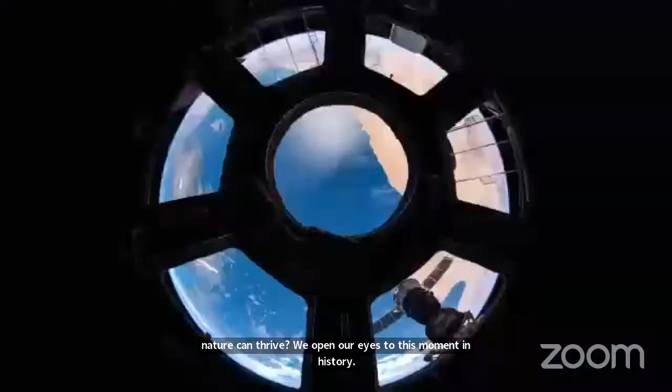How do we create a future in which both people and nature can thrive? We open our eyes to this moment in history. Think on a planetary scale. Embrace the challenge we face. And do something we humans are very good at. Change the world.

This biodiversity loss is not just a tragedy. It's the single biggest problem we face. Without biodiversity, the world as we know it doesn't work. Our planet needs its wild spaces. Every one is a component in the global machine. Only if they are all healthy can the planet run smoothly. A less wild world is less able to provide for our needs, less able to maintain dependable weather and seasons, less able to absorb our impact.

Can we turn this situation around? Can we rewild the world? Well, maybe, due to one key change.

As societies develop, something is happening that has never happened before. People are having fewer children. Globally, since the year 2000, the number of people under 16 years old has hardly changed. The main reason our population is still rising is because people are living longer. If this continues, our population may finally stop growing by the turn of the century. By investing in education and women's rights and raising people out of poverty, we could bring about peak human even sooner. This changes everything. It gives us the opportunity we need to regain our balance.

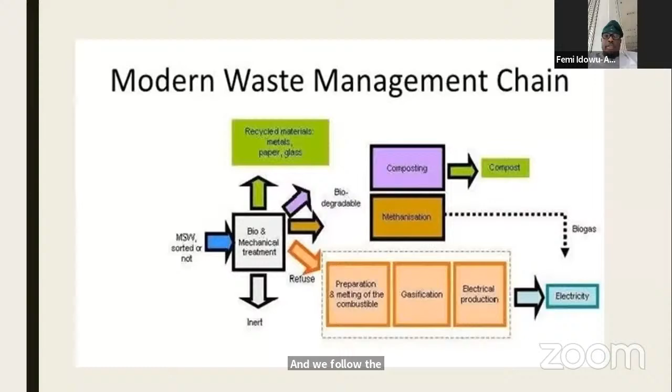Next slide, please. The next slide talks about different technologies. I've decided not to just jump into the technologies, but to tell us as individuals what we can begin to do to aid the treatment process. There are different options, which include segregation. If you generate waste, can you segregate it from your point of generation? Source segregation, source separation.

Then we look at reduction, which I call the optimum R. There's a general 3 R's, but we can break that down into several R's. Can you reduce the waste you generate? Yes, you can, by rethinking and buying consumer-friendly or environmentally friendly products to reduce your waste generation. Then there's reuse: you buy things you can reuse over and over again, so you don't just buy, take, make, dump, and discard.

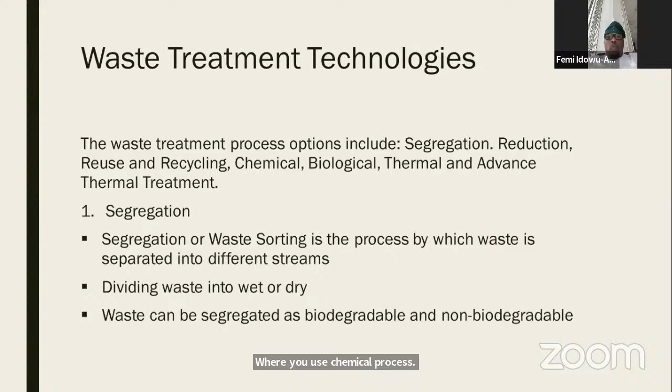An example of chemical treatment is pyrolysis, where you use a chemical process to treat waste. The biological process uses biological methods, such as composting, where you get compost from organic waste. This is a more natural process, and it could be either anaerobic or aerobic.

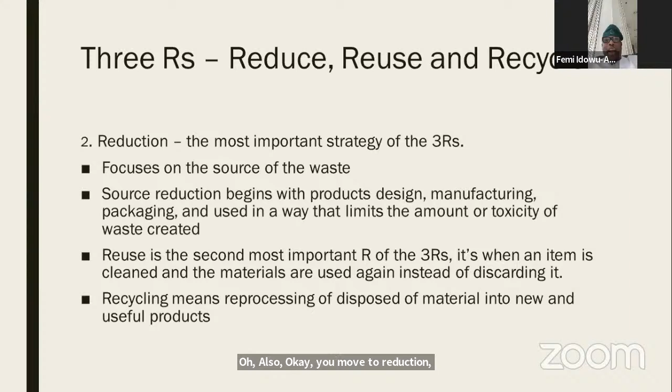Also, we move to reduction, reuse. I've talked about reuse, so now recycling, processing, and disposal.

Oh, please slow down. Okay, it's okay, stay here.

So now we're on chemical treatment, which I mentioned earlier, how you can transform waste through conversion of the organic fraction into various useful compounds, such as glucose and synthetic oil, gases, and glucose recovered from waste containing cellulose, which is paper. It's actually what you use in making paper, and it's biodegradable.

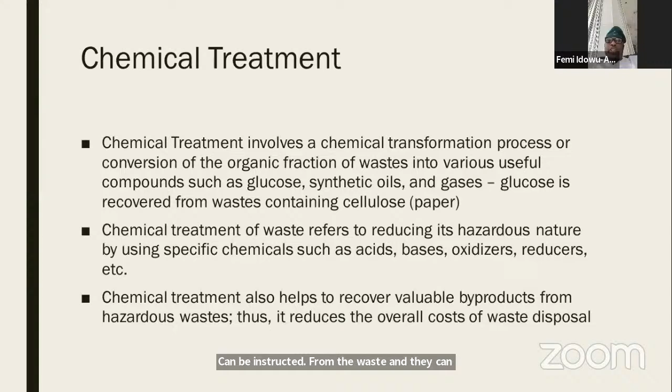Chemical treatment also helps recover valuable byproducts. For example, if you pyrolyze some of your plastic, you can get biodiesel and other products. Even chemicals can be extracted from waste and used for new production rather than extracting virgin raw materials.

This is just to simplify and show the flow of wastewater treatment using chemical treatment, what it looks like.

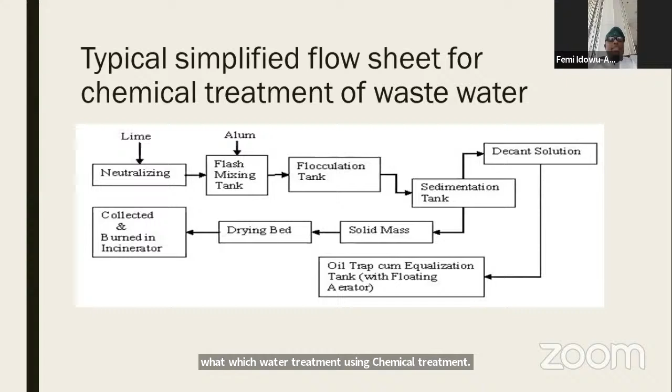Here's another diagram showing what I mentioned in the last slide. You can see clearly how the process is done, the effluents, the results from the cleaning, and how it's monitored, including pH measurement and all of that. These slides show it better.

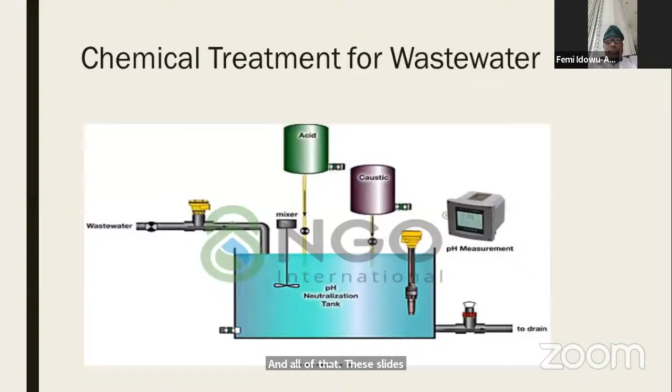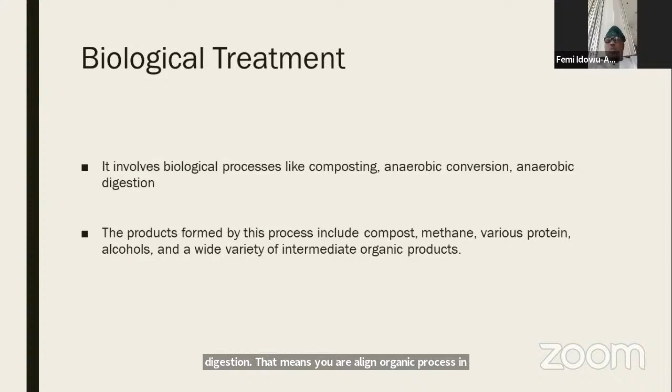So now we're on biological treatment. It involves processes like composting, which includes anaerobic conversion of organic waste, also called anaerobic digestion, meaning the organic process happens in the absence of oxygen. When you do that with organic waste, you get biogas and other resources, and the biogas can be used for cooking or electricity.

The residual from biological treatment is your organic compost, which can be used for soil conditioning in farming. So composting is controlled biological decomposition, as I've just mentioned.

The process of biological treatment takes about 4 to 6 weeks. But it's not only anaerobic; you can actually do it in an aerobic space as well. If you do an aerobic system, you must have land mass space. When you don't have space, you do anaerobic, which you can containerize.

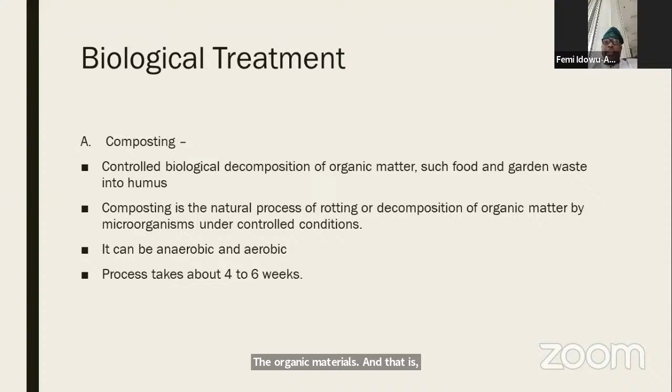The most popular aerobic system is the windrow system for composting, where you have to turn the pile daily to aerate the organic materials. That is the aerobic composting system, and the example of that is the windrow system.

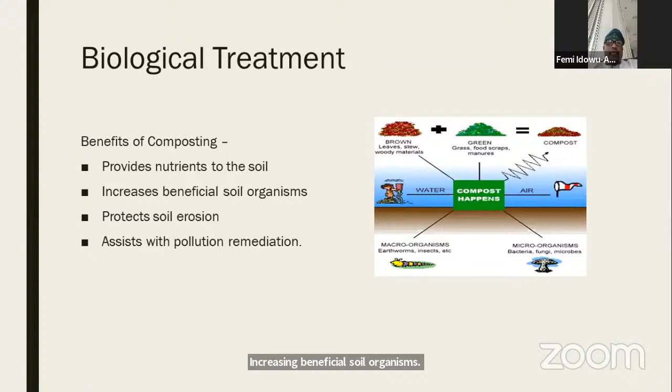This diagram shows organic biological treatment and its benefits: it provides nutrients to the soil, acts as a soil conditioner, increases beneficial soil organisms, protects against soil erosion, and assists with pollution remediation.

So this is landfill, but I'll call it engineered landfill, because the truth is that after all other processes in the waste management hierarchy, we still have a minimal amount left that we need to dispose of. Looking at the hierarchy, disposal is at the foot of it, and what we're trying to do with the inverted waste management hierarchy is have the least material going into disposal.

We still need to put that remaining waste into an engineered landfill. All over the world we have engineered landfills, which simply means the landfill is planned, structured, with layers and proper capping.

We can capture gas, we can capture the leachate. We're not just dumping either by open dumping or open burning or even controlled dump sites with no processes. For an engineered landfill, the landfill is planned, it is layered. We have geosynthetic materials that will be used to lay the cells, and it will be capped.

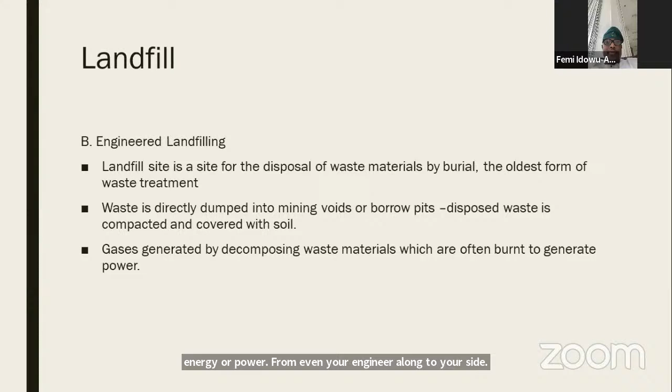These are the benefits: cheap waste disposal option, gases given off by landfill sites can be collected, as I've mentioned. Multiple waste types can be disposed of by landfill in comparison to other waste disposal methods.

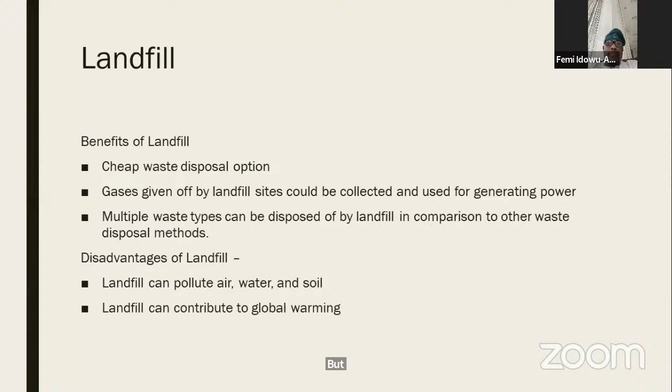But the disadvantage of landfill, mainly if it is not properly engineered, is that you're going to have air pollution, water pollution, soil pollution. Open landfills that are not engineered can contribute to global warming because of emission of greenhouse gases that are not captured, like methane, carbon dioxide, and hydrogen sulfide. So landfill is the least favorable treatment.

So incineration. Incineration has been with us for almost as long as humanity - people burn their waste - but there has been evolution in incineration, which is a thermal system of waste treatment involving combustion of organic materials or substances. It is done at high temperature, and waste material is converted into ash, flue gases, and particulates, and the heat that is generated is usable.

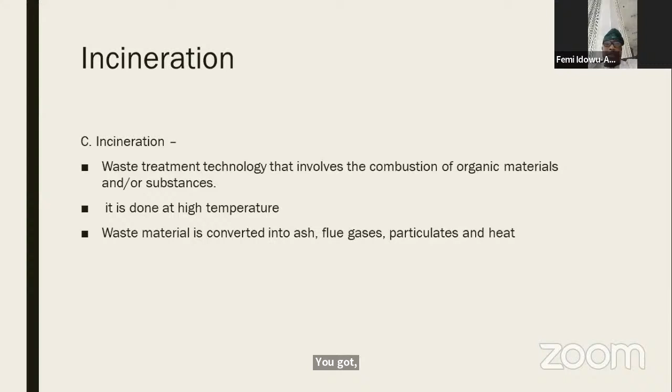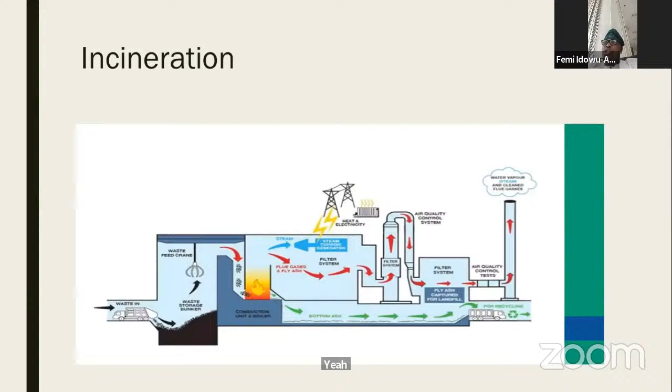So it is the steam that is generated after the burning, and the synthetic gas that is actually used to power the turbine, and then you get energy. Even the residual, which is the ash, can also be used as aggregates for road construction and other construction.

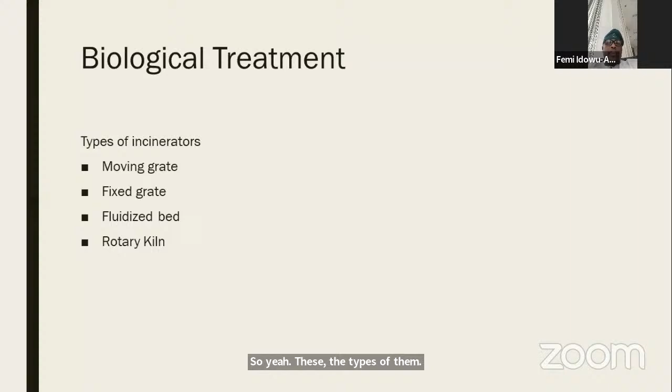These are the types of incinerating systems: the moving grate, which is the example I just showed earlier on, a fixed grate, fluidized bed, and a rotary kiln.

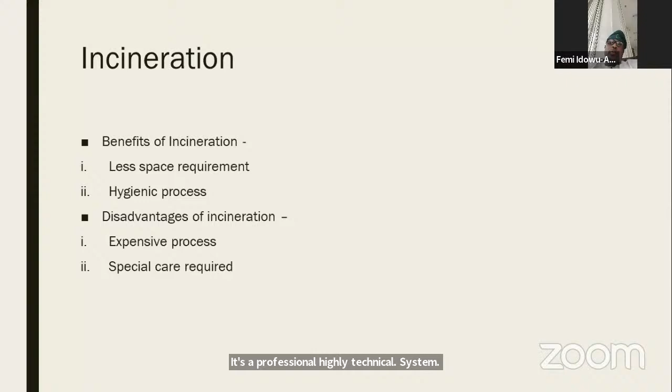Benefits of incineration: less space is required - you don't need massive land like for landfill sites - and it's a hygienic process. The disadvantages: it's an expensive process, highly capital intensive, and special care is required. It's a professional, highly technical system that one has to be skilled in. It cannot just be done by everyone - you have to learn it, study, and get practical experience.

Now this is the mechanical biological treatment system, what we call MBT. I'm sure most people would be familiar with this. We do a lot of mechanical here, not so much biological, but you can combine both. A mechanical biological treatment system is a type of waste processing facility that combines a sorting facility with a form of biological treatment such as composting or anaerobic digestion.

I know that either formally or informally, we find out that we're doing a lot of sorting of our waste, either manually or using machines, in this part of the world. MBT plants are designed to process mixed household waste as well as commercial and industrial waste. One of the advantages of this system is that even in areas where your waste is not totally sorted, you can deploy a mechanical and biological treatment facility or methodology.

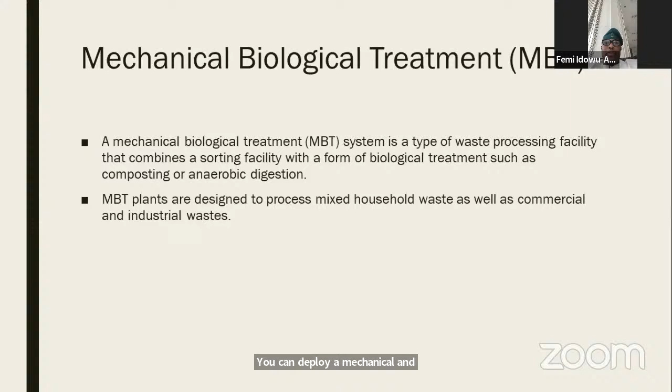This is a diagram showing the mechanical and biological treatment process - how the waste comes in, how the sorting happens, and the one for mechanical treatment goes to its own process, which is recyclables. You can see the mixed biodegradables come for the biological digestion process, and like I said, you get your organic compost and the gas, which is mainly a biogas system. This is a combined technology, combining biological and mechanical, for use in a place where you cannot have source separation or multiple bin systems.

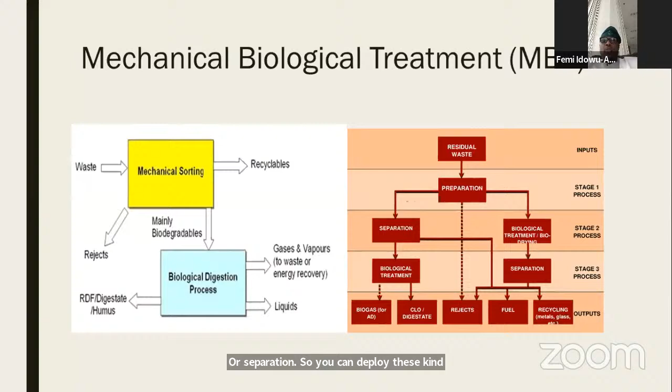So you can deploy this kind of system when you have a commingled collection.

So yes, these are what you get after processing. This is what we call RDF or SRF. RDF stands for refuse derived fuel. SRF stands for solid recovered fuel.

The difference between the two is not much because this is produced from combustible components that the industry calls municipal solid waste - our everyday waste, after we've taken out the recyclables, taken out the organic matter for composting, and we're generating biogas. What is left that we cannot use again is residual waste. So this residual waste, when shredded or treated, becomes a solid fuel.

But when it's just left in open space, not treated, it's shredded and used to fire. Most of these are used in cement kilns, industrial power systems for cement factories. These materials are fed into the cement kiln and heated or burnt at over 1,000 degrees centigrade, practically burning them into ashes, which get mixed with the cement.

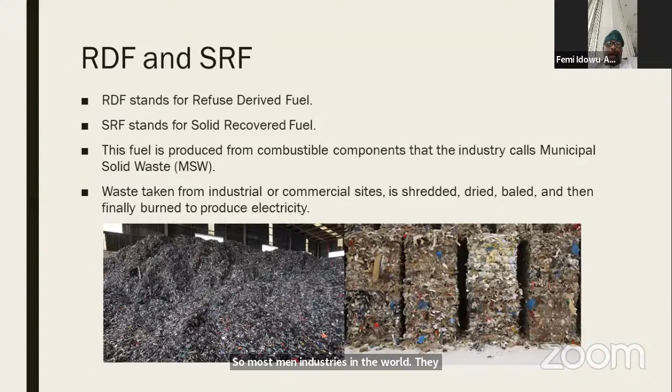Okay, this shows the difference between SRF and RDF. The main difference is how refined and processed the final product is. SRF is a more time-consuming process, but the resulting material is very usable across the rest of industry, while RDF, not being fully processed, is less refined and typically not as efficient as fuel.

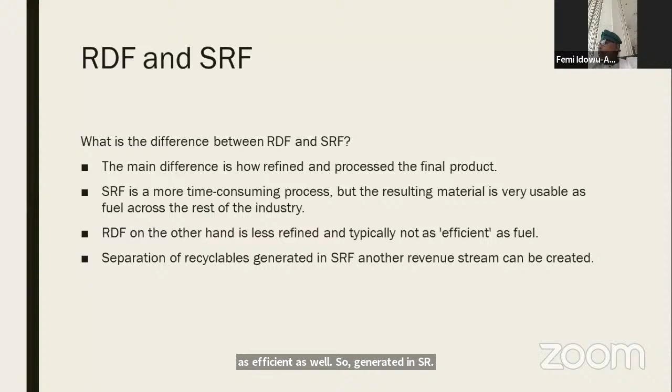So with separation of recyclables generated in SRF, another revenue stream can be created. Those are the benefits.

So yes, this is another treatment method called mechanical heat treatment. We've talked about mechanical and biological, but this one is a mechanical heat system, an alternative waste treatment technology also commonly termed autoclaving.

It's mainly used for medical waste. It's like a boiling system where you put the waste in a steel container in the absence of oxygen, and it is heated to a certain degree, and the materials are shredded or boiled. So that's why it's called mechanical heat sorting or processing stage.

With this technology, often found in material recovery facilities, this might take the form of a waste autoclave or processing stage to produce a refuse-derived fuel pellet.

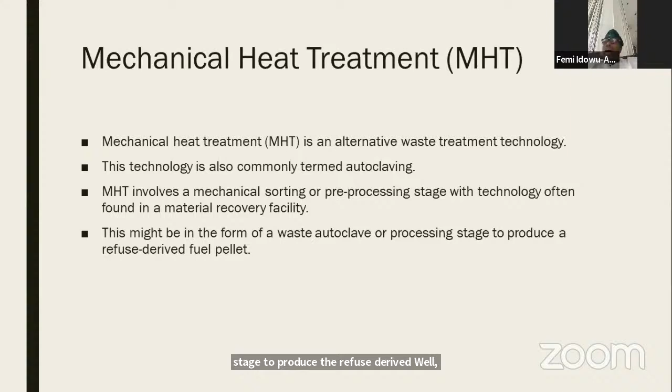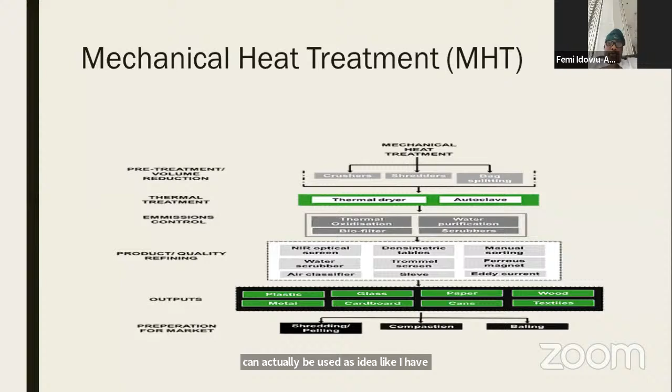After the whole process, what is left can actually be used as RDF, as I mentioned, as the residual after you've taken all the benefits. This diagram shows the mechanical heat process.

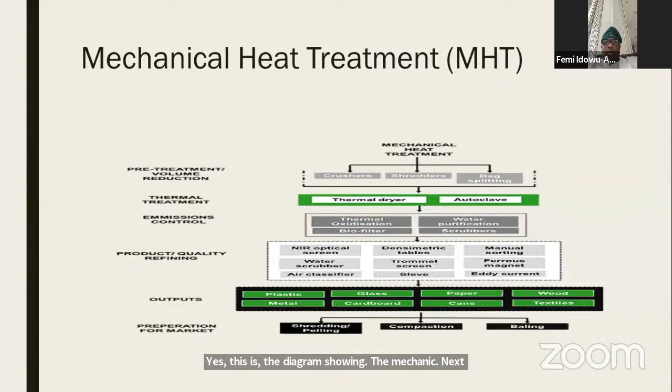And the disadvantages of this application to municipal waste include a limited track record.

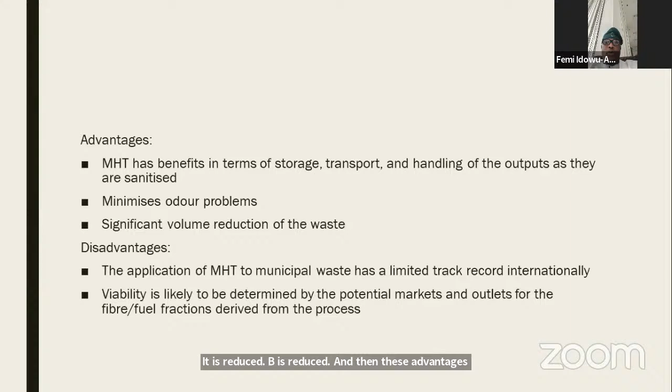There is a background noise, please. I don't know who that is. Please, can you mute so that we can get through this on time?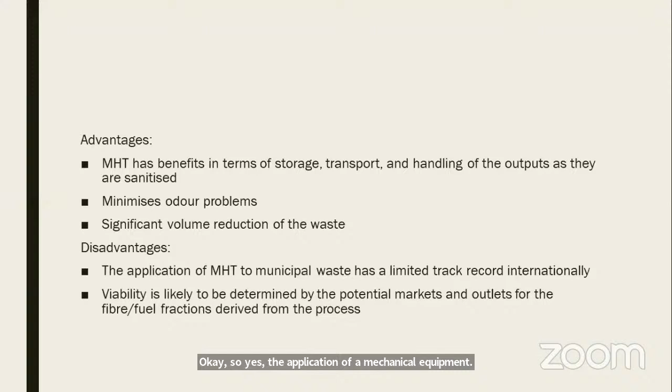Okay, so yes, the application of mechanical heat treatment for municipal solid waste has a limited track record internationally - we know it's not widely used - and viability is likely to be determined by the potential markets and outlets for the fiber and fuel fractions derived from the process.

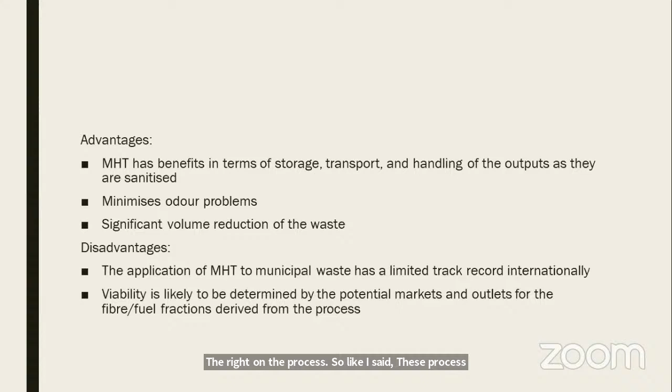So, like I said, this process is not widely used. It's mostly used in the medical waste system because of the sterilization process it offers.

So yes, advanced thermal treatment. I know most people are aware of when they talk about gasification, pyrolysis. These are advanced thermal treatment from incineration earlier on, which is a fire burning system, a grate system, but there is an advanced thermal treatment which involves indirect burning as well.

It is heated, there is external heat that melts, but it's not directly on the waste itself, in an enclosed system, which leads to the pyrolysis and gasification process. This excludes incineration because incineration is direct, almost direct burning. You are applying fire to the waste and then capturing the steam for energy. But in pyrolysis and gasification, it is not direct fire on the waste.

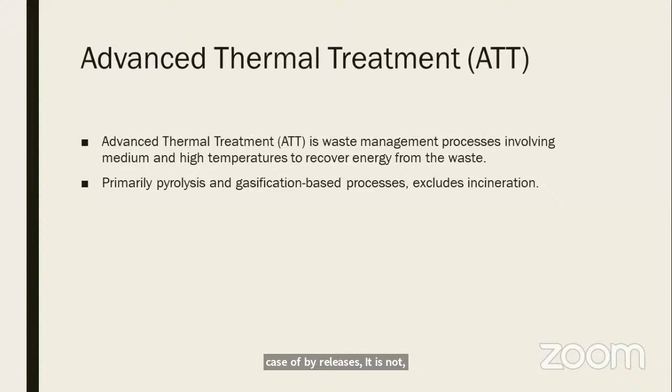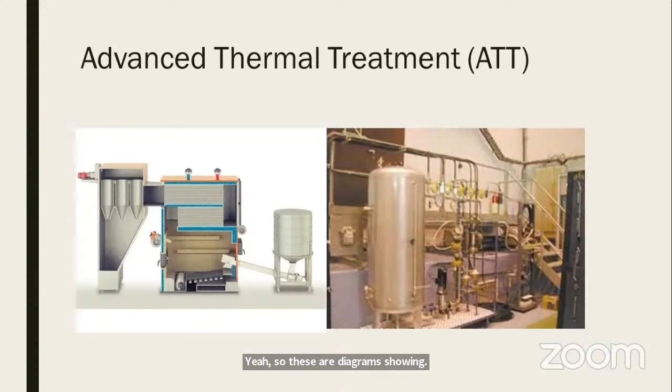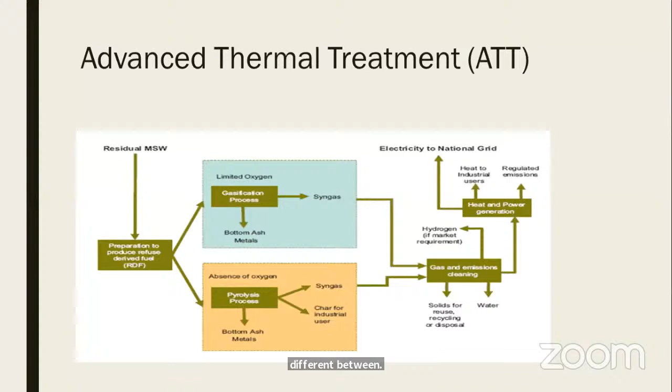Next slide please. So these are diagrams showing the modern advanced thermal waste treatment. Next slide please. So yes, this is an annotated diagram of an advanced treatment, and from this diagram you can see the difference between pyrolysis and gasification. Next slide please.

So this is pyrolysis. It's a thermal treatment of a material in the absence of oxygen to produce gas, which is synthetic gas. It produces synthetic gas, liquid, and solid char fractions. That char fraction can be used as aggregate as well. Pyrolysis generally requires an external heat source to maintain the temperature required, and to avoid the introduction of air, so there's no air of any form. At each level of temperature you get different materials - liquid at certain temperature, gas at certain temperature, char at certain temperature. So that's pyrolysis for you.

Next slide please. So yes, this is, I think I've spoken to this. Raw mixed waste is usually not appropriate, so you cannot put all your waste that is mixed together for pyrolysis. It's mostly single stream for pyrolysis. You want to pyrolyze used tires? Yes. You want to pyrolyze plastic? Yes, different types of plastic as well. So this is an advanced thermal system that is feedstock specific.

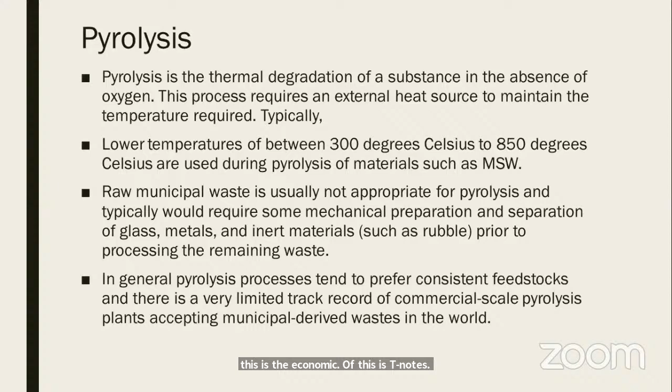Next slide. So yes, I think I've shared the benefits and mentioned the challenges already. One key issue of using syngas for energy recovery at advanced thermal facilities is the problem related to tarring - the deposition of tars can cause blockages and other operational challenges. This usually occurs when the temperatures are not consistent. When you have tars in the process, it blocks the pipes, the capture pipes, or hoses. So tarring issues may be overcome by higher and more consistent temperature in the processing.

Next slide please. So yes, now we come to gasification. By here we'll be able to understand the difference. For gasification, the temperature is higher, typically above 650 degrees Celsius and up, whereas for pyrolysis it's between 300 to 850 degrees. So that's one major difference.

Raw mixed waste is usually not appropriate for gasification either, and it typically requires mechanical preparation. You can't just collect your waste and say you want to gasify it - you have to have mechanical preparation and separation of materials like glass, metals, and inert materials such as rubble. Because when this goes into your gasification process, you need to gasify high calorific materials - that's what you put into your gasification chamber. Next slide please.

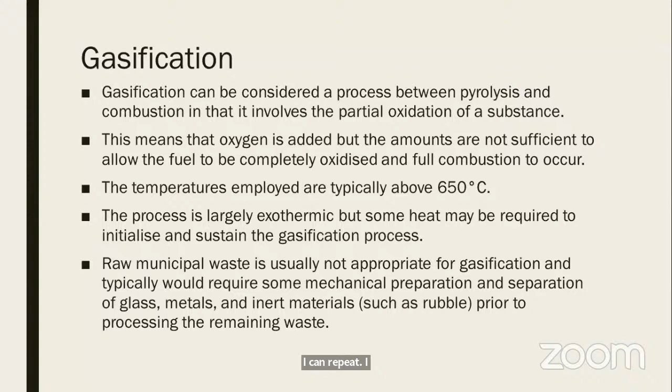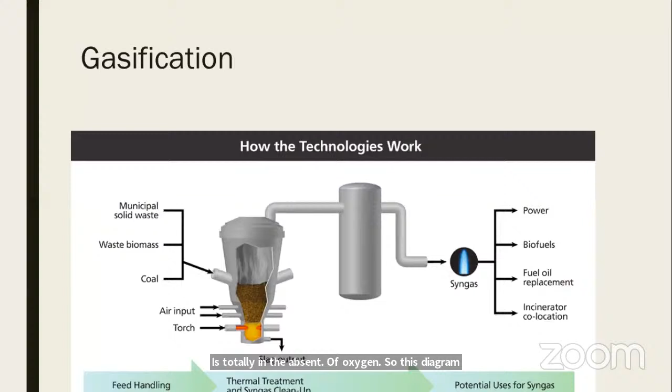In gasification a little oxygen is allowed, whereas in pyrolysis it is totally absent of oxygen. This diagram shows how the gasification technology works. Next slide please.

So the main product of gasification is syngas, which is synthetic gas.

I said earlier that you need high calorific material. The gas generated from gasification has a net calorific value of 4 to 10 megajoules for its effectiveness. So the calorific value of syngas from pyrolysis and gasification is far lower than natural gas. We know that, so it's not a competition with natural gas. These are just technologies and processes for waste treatment, so they cannot really take the place of natural gas, but they can complement whatever natural gas is doing.

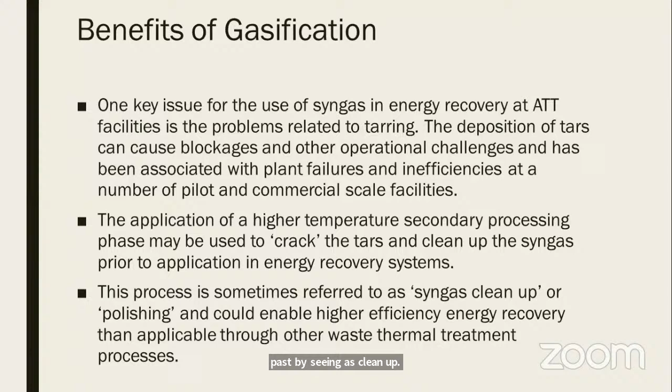It has its own challenges, and most commercial gasification facilities processing MSW-derived feedstocks utilize a secondary combustion chamber to burn the syngas and recover energy by a steam circuit. This is not incineration - the differences between the processes in practical and efficiency terms are much more modest.

Some plasma gasification technologies are examples where a high temperature electric arc method is applied, potentially at various stages of the gasification process in different configurations. So it's not one size fits all. There are several initiatives seeking to achieve high energy recovery efficiencies using gas engines and hydrogen fuel cells linked to gasifiers. So you can see these are still technologies that are still undergoing refining and work in progress, but we can deploy them to manage our municipal solid waste.

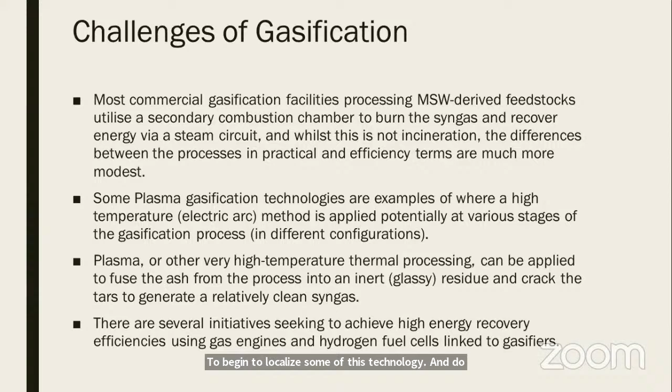There's a need for us, as people in this part of the world, to begin to localize some of this technology and do research and development, R&D, to see how we can think global and act local.

This is plasma gasification, which is a type of gasification process.

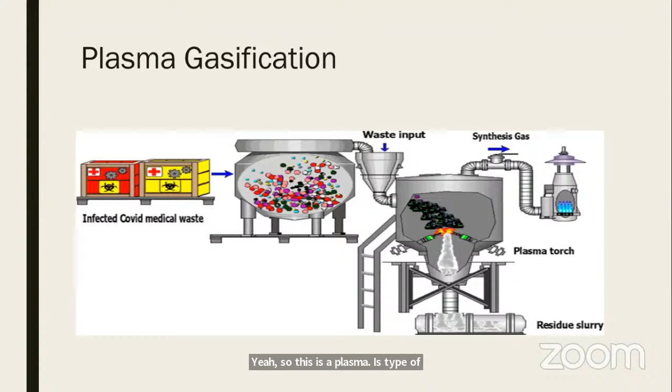Emission control - these are global standards, which are necessary because I know people are going to ask, when you use this technology, is there no emission? Yes, but they are permitted through the Industrial Emission Directive, a global standard. The key requirements in the IED for the operation of an advanced thermal treatment facility are the minimum combustion temperature. If you are not going to achieve that temperature, then it's no longer advanced thermal treatment anymore. Then there are specific emission limits for release to the atmosphere.

There are limits on these: sulfur dioxide, nitrogen oxide, hydrogen chloride, hydrogen fluoride, and other gaseous substances - there are global standard limits on what you can emit. So we don't just say, oh, I'm just going to go and buy the system and deploy it. No, you have to follow all these regulations, and then we have to domesticate this in our own system if we want to go into an advanced thermal treatment system.

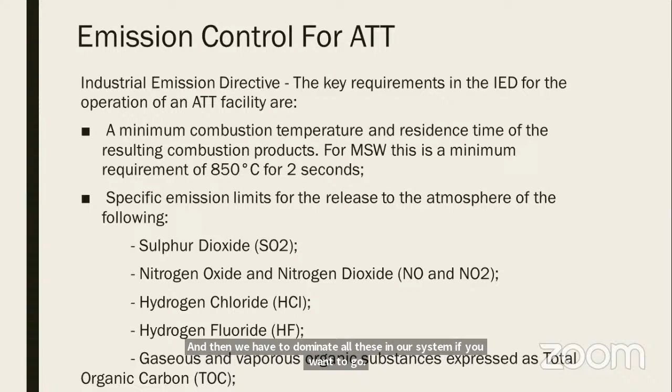These are other releases that we cannot just release: dust, the limits on heavy metals, dioxins and furans, carbon monoxide. There's a requirement that the resulting bottom ash and slag produced have a total organic carbon content of less than 3%. The moment it's more than 3%, it becomes a problem. So these are standards that need to be met for you to deploy any of these advanced thermal treatments.

Thank you very much. If there's any question.